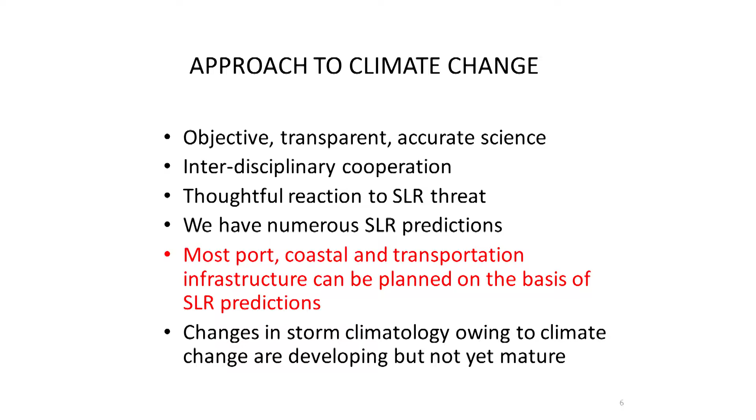Right now, the changes in storm climatology is not that mature a science, at least as far as I can tell. And so how things change in terms of waves and wave action is less understood, and I'll give an example—a little less understood, or maybe considerably less understood, than the water level changes themselves.

If you go to the NRC2 scenario, it's only 1.3 feet. So you have to, if you wish to use those numbers, good. They're a little higher than the IPCC report that was issued last summer.

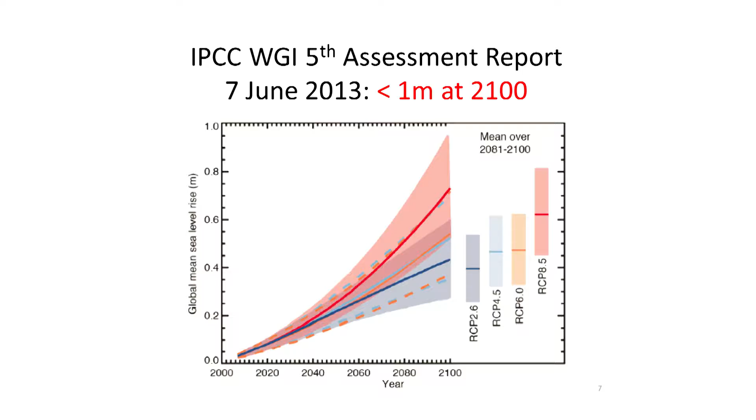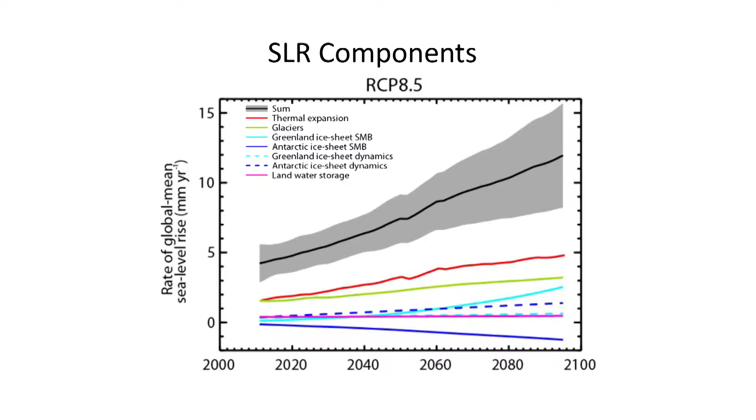In business school, which I never attended, by the way, but I've read up on it, is this idea of decision tree analysis, where you try to make a rational decision as to whether you should invest in one thing over another. So I've tried to adopt this to this case of sea level rise, and I'll step out here to do here.

NRC is the lowest. The medium range is the lowest at 0.2 meters over a 50-year period. And then the NRC2, I have it at 0.39 meters over a 50-year period. And then the NRC3 at 0.58.

And what I've done is I've said, well, if the medium—I've said that the probability is 50% that it would be on the medium path. You can change this around any way you wish. And then I've said 25% chance for each of the other two. Then you go this, I'm making a separate branch for the final 50 to 100 years.

And when you do that, you then break it into different pathways. And I've gone on the NRC one thinking that if once you start on a path, you'll have a tendency to stay on that path.

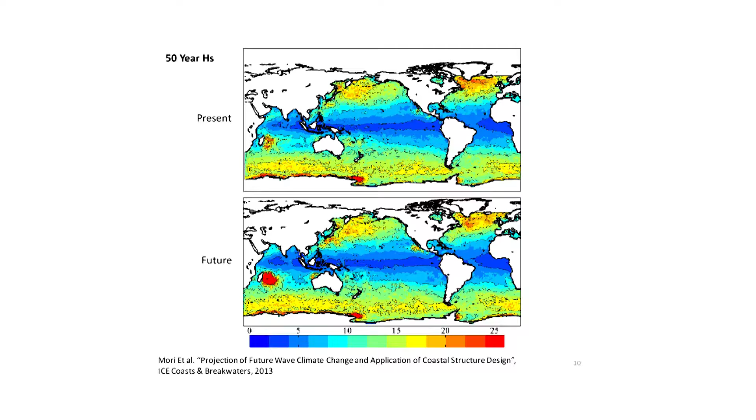I think it'll be some time before we have strong numbers that help us understand how the waves are changing. Of course, in shallow water, in most coastal engineering applications, the waves are depth limited for beaches and most coastal structures. In some parts of the world, like Spain, where they have large caisson structures in deep water, they may not be depth limited. But when they're depth limited, the waves can only be so large. I know people are working on that, but it seems quite a task to figure out what's going to happen to the waves.

So this is the basic concept of adaptive management. You would start with an existing rate of sea level rise, and you might either have a new structure that you design at that rate, probably not, or an existing structure which you'd have to adapt from that. The idea is that at some critical point in time you would make a change to your structure or beach in order to keep pace with sea level rise. Over 100 years, maybe you would do 1 or 2 changes.

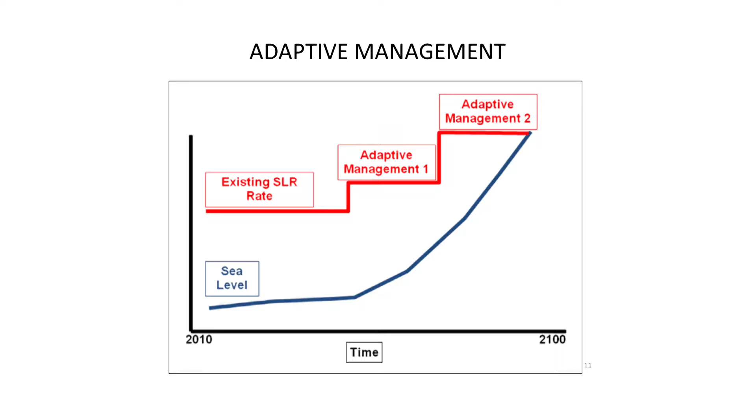We'll start with an example of ports. I've listed the potential impacts to ports: increased flooding and related power loss that can shut things down; weather changes that could affect shipping and cargo movement operations; bigger waves, different kinds of wave climates; pressure on drainage systems; increased water demands in some parts of the world; increased temperature affecting buildings, pavement and equipment; potential changes in sedimentation; and marine structures, fendering, plus the issues of air draft, both under cranes and under bridges.

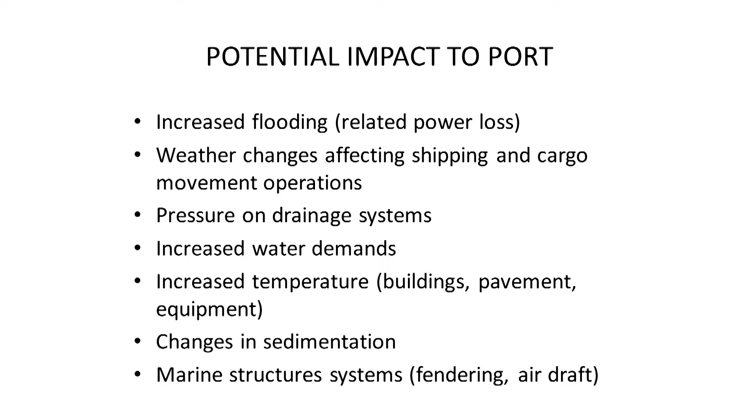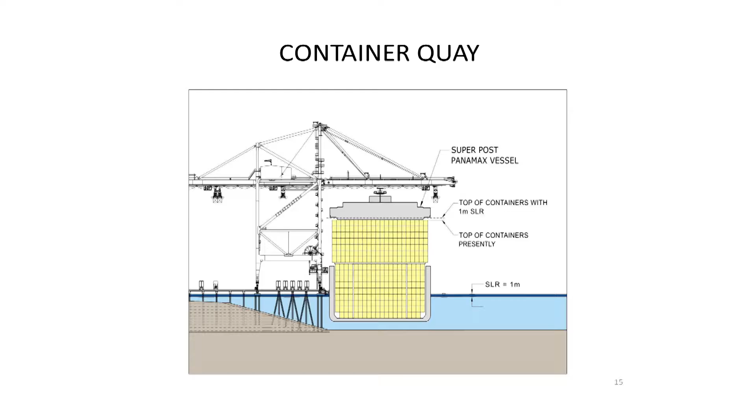If you start to scale for container ships, the change of a meter of sea level rise, in the grand scheme of things, you could reach a point where you might have to take the top layer of containers off. That would be a considerable economic impact, but ships will be changing over time as well, and who knows exactly how that will go. That's more of an economics question than an engineering question.

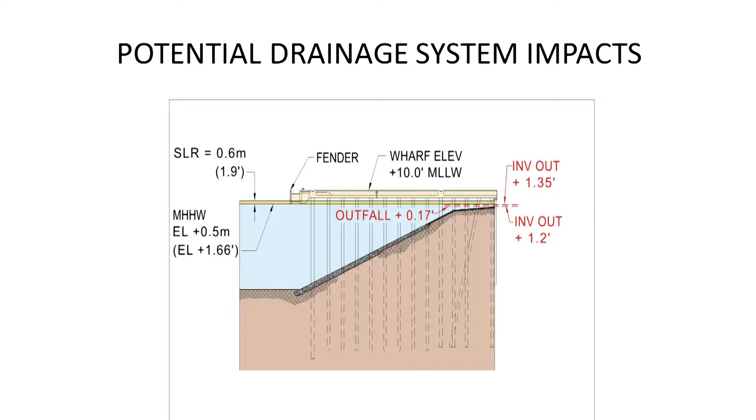You can see the 1.9 feet is over roughly a 50-year period. We are basically, in this case, having drainage problems with outfall. I won't go through all the details, but we'll have to prepare a new trench drain system to take care of the drainage.

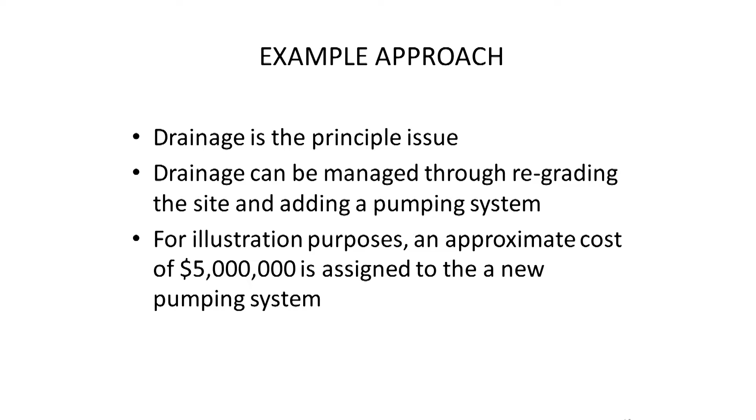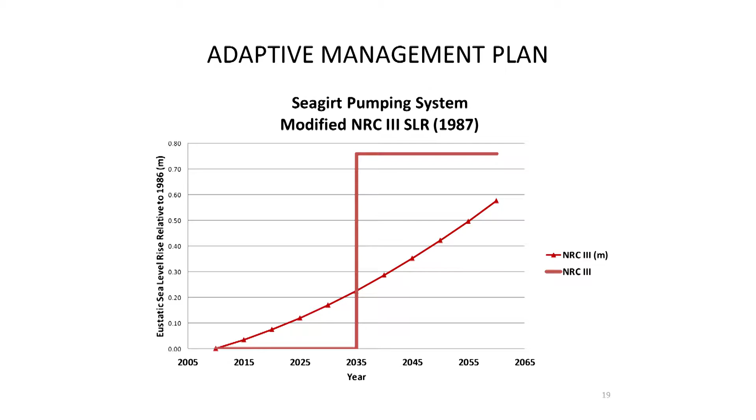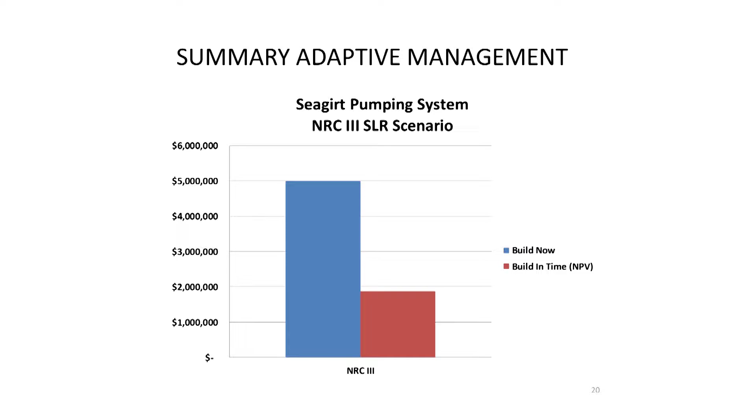This can be managed through regrading and adding a pumping system, which is relatively inexpensive. Essentially, 20 to 25 years from 2010 you might make that investment. If you look at it in terms of net present value, it's the opportunity cost of money. If you're familiar with this economics principle, you don't spend money on something now if you don't need it now - push it off and spend your money on something else.

That sums up the overall thesis: rather than going out there today and starting to raise things, we need to look at scenario planning, and planning is a very valuable exercise. You plan out how you might change your port or your building over time, and have a plan so you can communicate it - people know you're doing something about it, but you're not spending money unnecessarily.

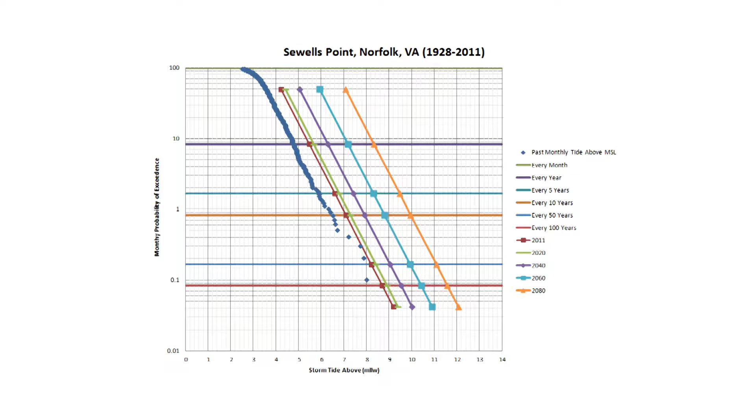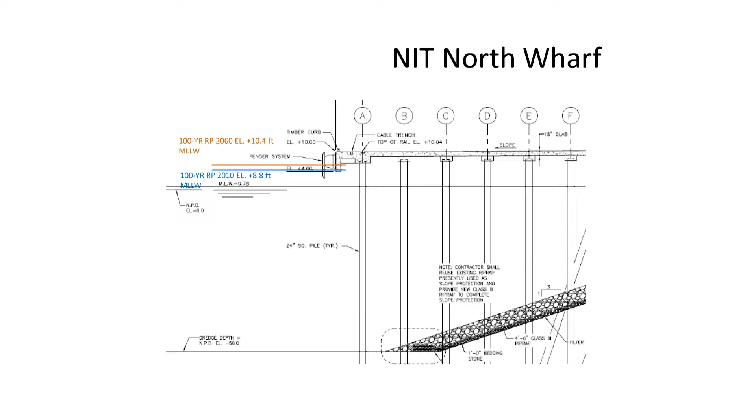So if we look at the NIT North Wharf, you can see what happens over that time. You probably have to do something about the fendering system, you might have to do something about the loads on the berth. But in the grand scheme of things, it's not that debilitating - you'd have to do a whole structural study of the pier and so on.

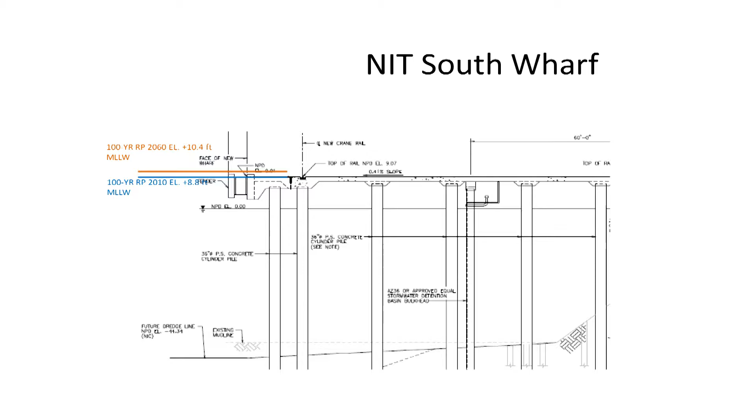But this is the South Wharf. Here we have a little more trouble because they're already relatively vulnerable to storm tide, the 100-year tide now. I've got other examples I'll show you in California and elsewhere as we go along.

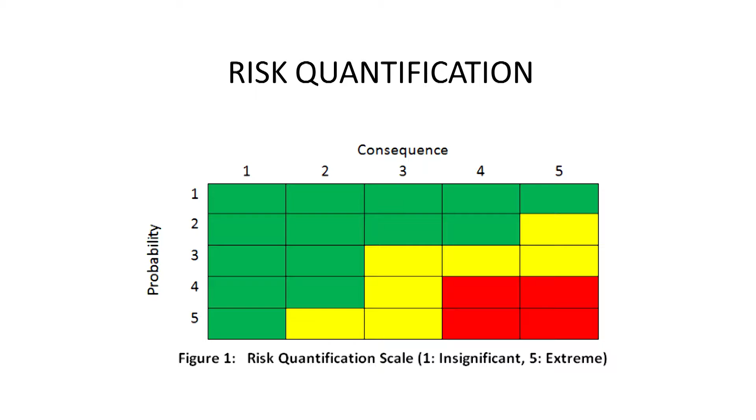The UK has developed a risk assessment approach for sea level rise, with categories like changes to wind, climate and patterns, changes in precipitation, increased temperature, and general climate change. The way they've done it is you have the probability of it happening, and the quantification of risk, where a 1 is green meaning no real impact, yellow is intermediate impact, and red, the 5s and 4s, is extreme impact. So you look at these different factors.

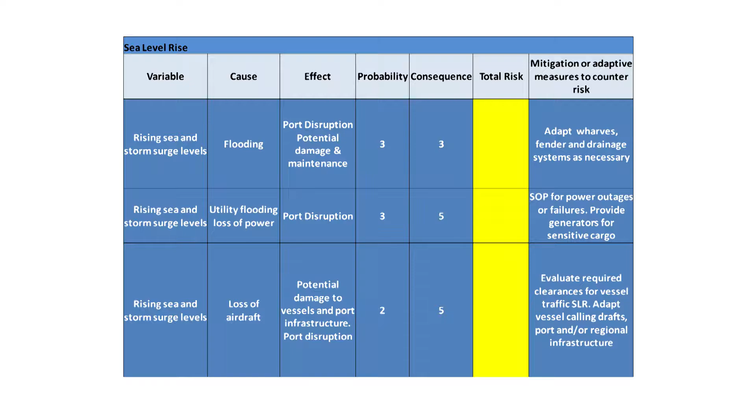This is what we've done for the ports here. Rising sea and storm surge levels is the variable, it causes flooding, its effect is potential damage, downtime and maintenance. We assess probability of it happening, the consequence of it happening, and arrive at this total risk. The idea is that this is not a situation where you do nothing - we would adapt over time to limit this risk and impact with fenders, drainage system changes, and other necessary things.

Then we've got something similar for, again, in this category of sea level rise, loss of power, flooding issues, port disruption, and so on.

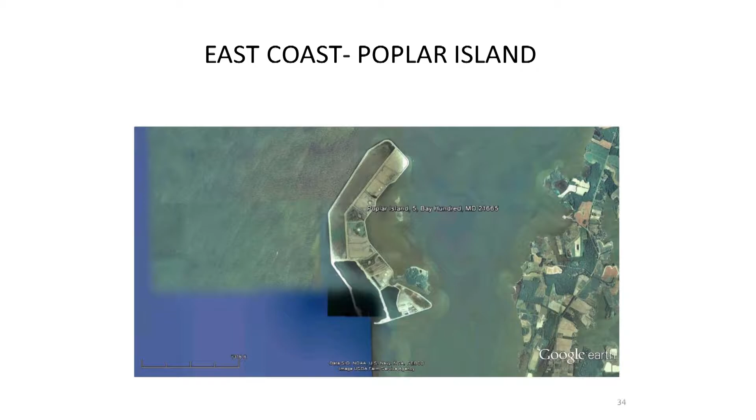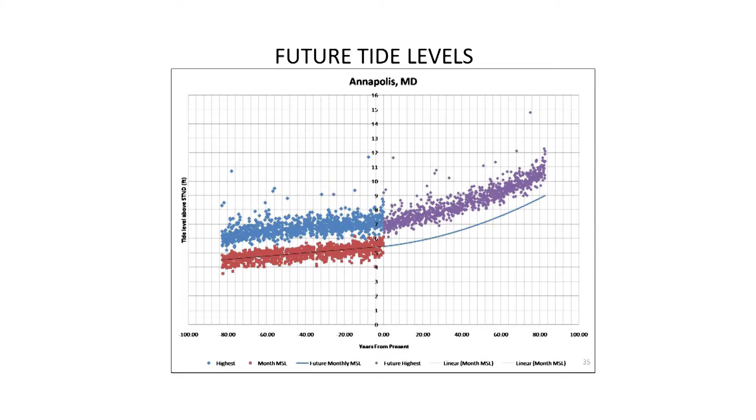So this is a structural example, this is Poplar Island in the Chesapeake Bay. It's a dredge material placement site, some of you may be familiar with it. Again, this same analysis, I won't go through it again, but this just shows the shift in return periods and water elevations over time based on the Annapolis gauge.

This was the original cross-section design of this structure, and you can see it's a rock-armored revetment seawall, if you will, and it was designed for a crest elevation so that it wouldn't be overtopped because there's a gravel road behind it. So basically, I think this is an important point.

If you look at a coastal structure, the difference in water level over a 50-year period, and to a large extent over a 100-year period, is not likely to make you go out and put new rock on top of this structure. The changes in rock size required to keep pace, at least over the 50 years, is a relatively small number. You're just increasing, if you know what the SD is in the armor calculations, you're just increasing the damage the structure will have over that 50-year time.

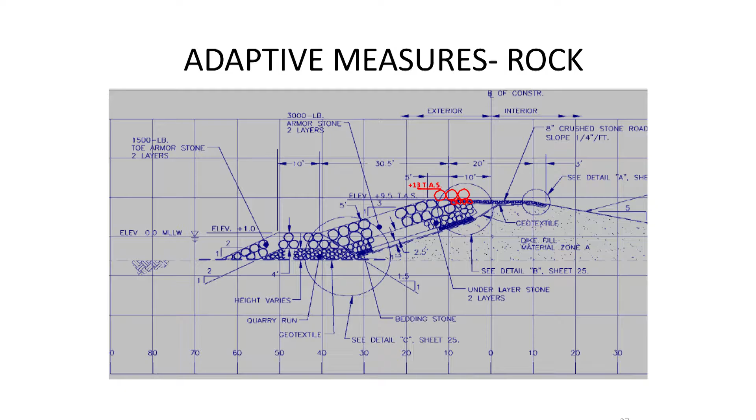It would be, I think, foolish to go out and overlay it with rock that only has to be 15% higher than the rock that's already there. So I think that's the way to handle this. On the other hand, if you start to look at the overtopping, and if you're very vulnerable to overtopping, you might want to do something for it. So what I'm showing here is a layer of rock and an underlayer that will provide overtopping protection in the future. You'll see something like that in another example later.

On the other hand, when I click, this doesn't always change, maybe it's the angle I'm at. The other thing we've been trying to work on is looking not only at using rock for such a thing, but also having grass-armored revetments.

Because a place like this site, which is full of sediment because it's a dredge material placement site, they can plant grass. Of course, they'll have to mow it, which is not particularly attractive. But at any rate, there's a lot to be done, there's a lot of possibility there. And I think the softer armor, there should be more of that in coastal engineering.

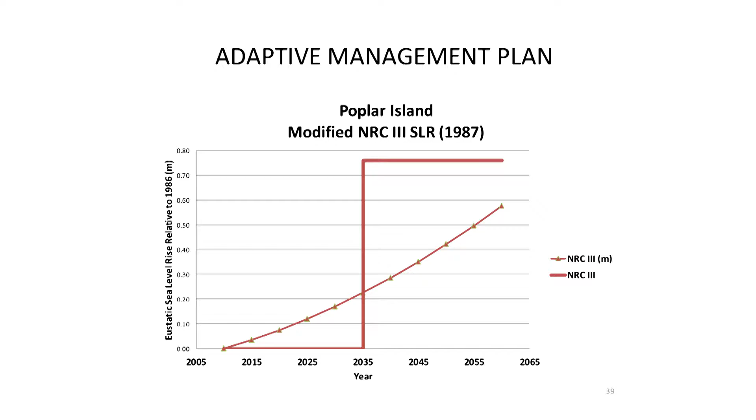There's some, so that's, I'll talk a bit more about that in a minute.

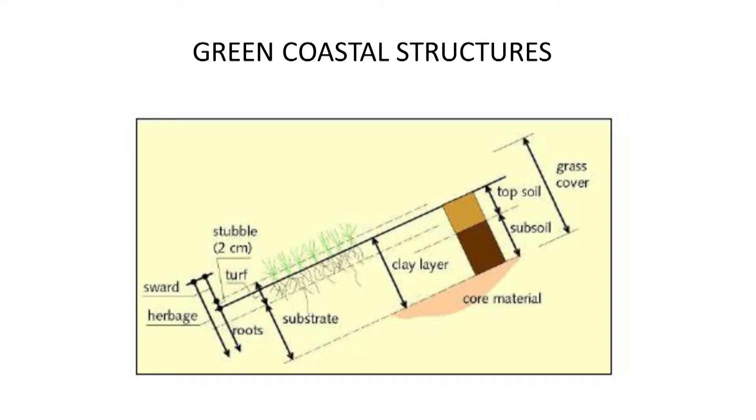And I'll show you an example in California that bears the same conclusion. You look at the difference in wave height, because the waves are depth-limited, it's hardly changing at all.

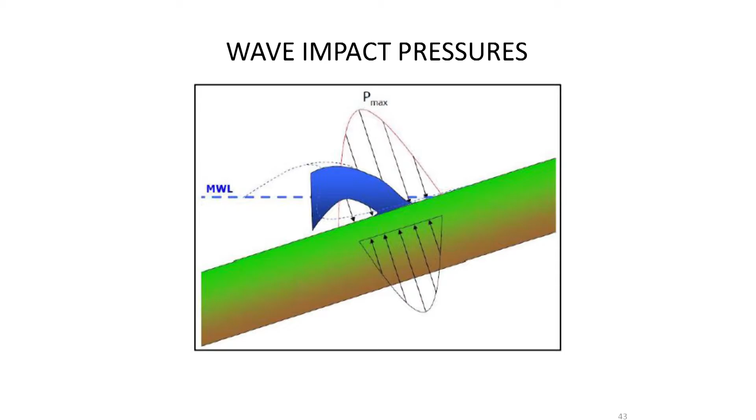So just practical things. This is a model developed by the Dutch on how to compute the forces on grass slopes, and this gives you an idea. There are two failure mechanisms.

One is called aggregate erosion, where you're starting to get these bare spots in here. And then there are these block erosions, where you lose a big part of the revetment all at once. The structure is more resistant to block loading rather than the aggregation.

So it's all been developed on the basis of full-scale tests in Dave's favorite flume in Germany. And so what you can do with the equations that they have there is you have the wave impact forces, and it's treated as an impact force.

And then through a bunch of other equations you can determine what the erosion depths are. When you reach a certain erosion depth, then it's considered to have failed. There's a couple of other parameters in here, erosion parameters and number of impacts and so on. But what we found in this particular case is that the allowable wave height would be about 2.3 feet.

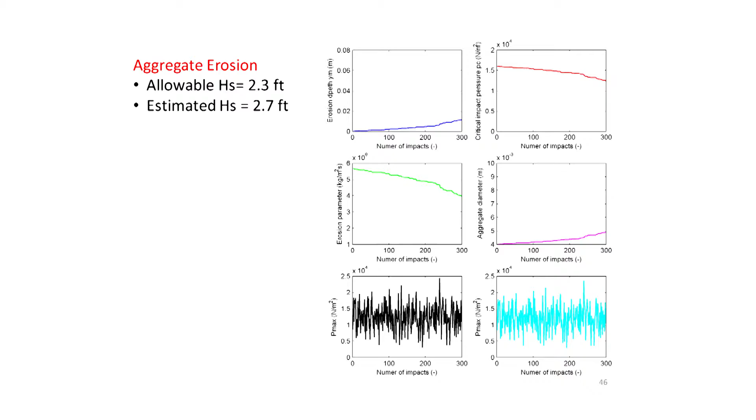All right, West Coast structure, Los Angeles. For those of you familiar with California, you'll know they don't have much storm surge. They have different kinds of waves there, much longer wave periods, but no storm surge. So if you're an East Coast snob, you'd say they have it easy, but they say their waves are so big and they have tsunamis, so their problems are harder than ours.

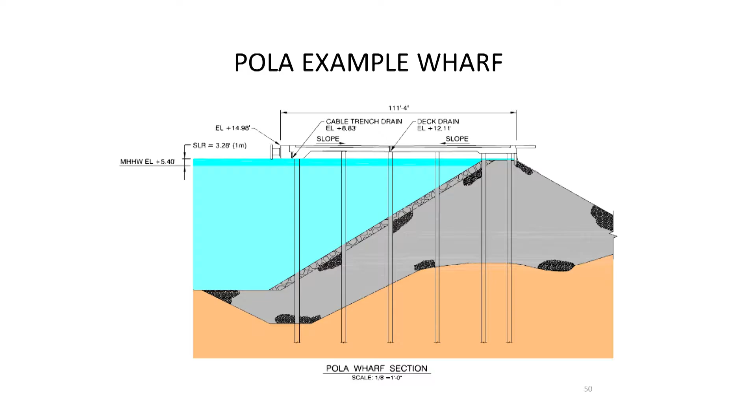This shows you the Port of Los Angeles, its ports, similar to what I showed you before, the difference with a meter of sea level rise. Not an insuperable problem. Most of these projects will be rebuilt. Few piers have more than a 50-year life.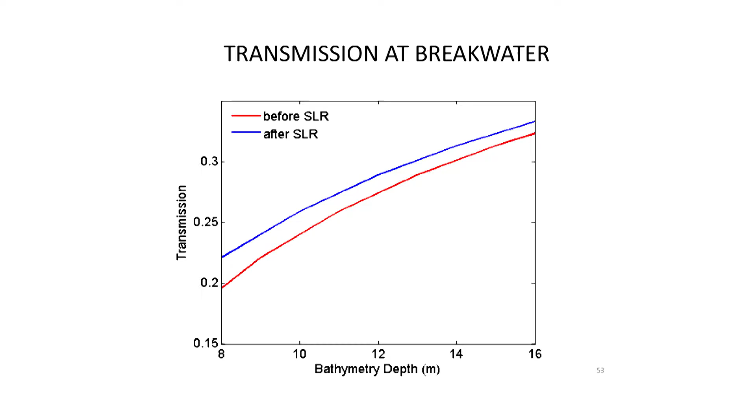This slide shows that before and after sea level rise, you don't see a strong change in the transmission coefficient between those two scenarios. Well, you don't have the before. There are always gremlins. Well, that's not going to help.

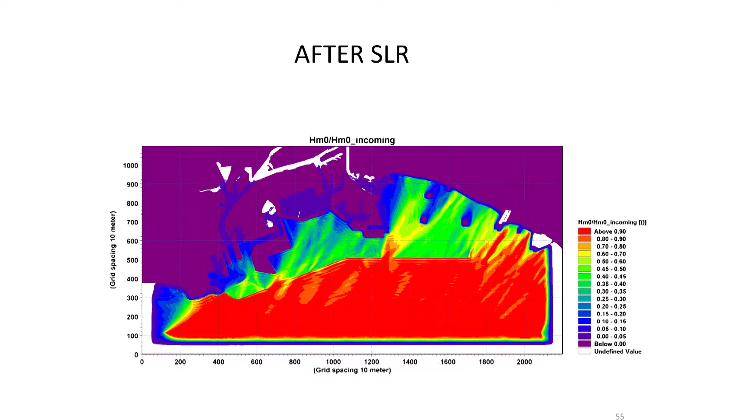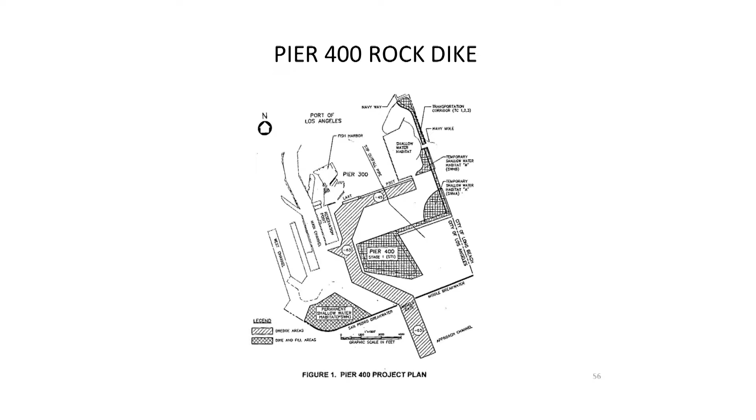I'm showing here, this was a landfill project for the Port of Los Angeles, and this is the most exposed face. The design wave for the 100-year event is about a 20-foot wave. So it's significant, a big wave.

But it was model tested and found that it could be handled. They were using something like 25-ton rocks, I believe. I might have them up there.

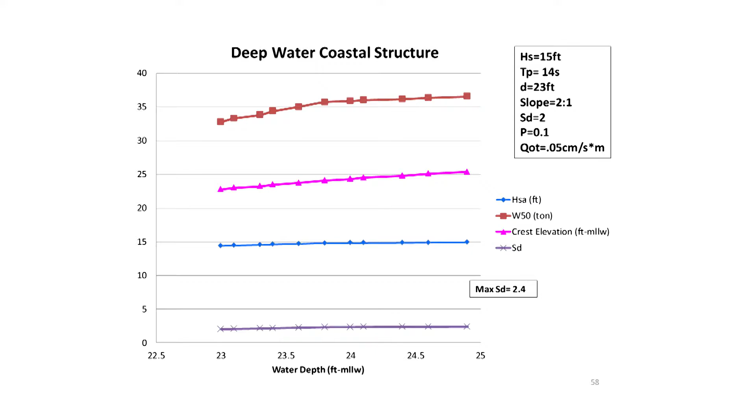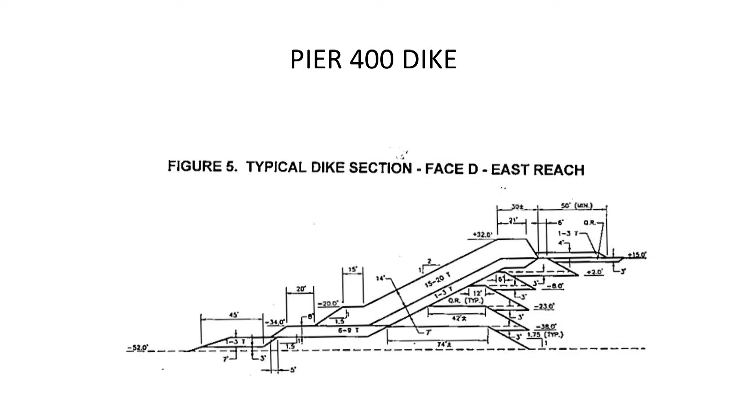You see a need again for a change in the crest elevation, but it's relatively small because they don't have that big storm tide part of it. The change in the SD just goes from 2 to 2.4, so it's still a structure that's going to hold up. In this case, we might put some protection on the top or just on the back slope because it's slightly above grade there. That's what I was talking about, slightly above the grade.

Just looking at this a different way, since I've already shown you the numbers based on Van der Meer's equations for rock size. But we originally did a design optimization to design this structure, which balanced the damage costs, which go down the higher your return period, against your construction costs, which go up higher with larger return periods. Somewhere in there is this optimal balance of damage and construction costs to get the total amortized costs.

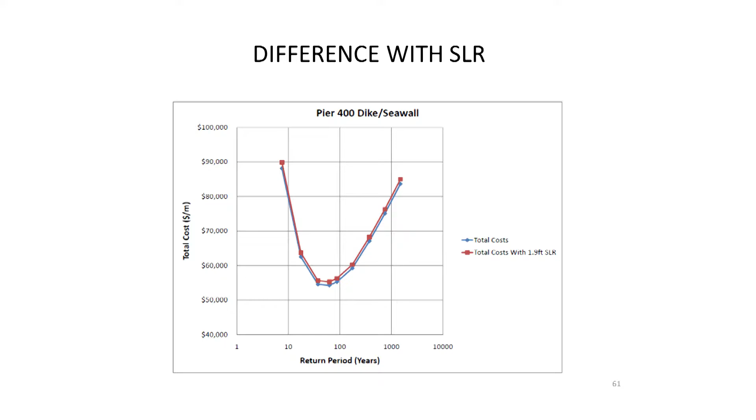So what happens here is I'm showing the difference in the optimization curves with and without basically 2 feet of sea level rise over 50 years. And you see it's just not, again, it's the same thing over and over again.

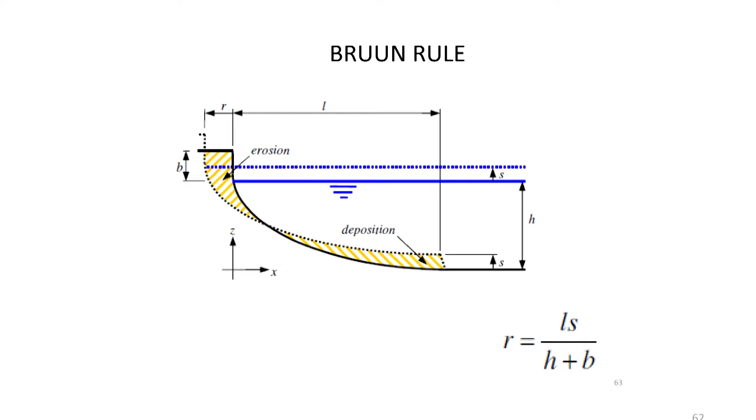Okay, on to beaches, so maybe changing gears in a different direction. Many of us know about the Bruun rule, a very simple geometric method of figuring out how much beach and what volume of beach you lose in a given sea level rise. So I did an example based on the Duck Pier, using basically a 90-year period, or a 100-year period of sea level rise.

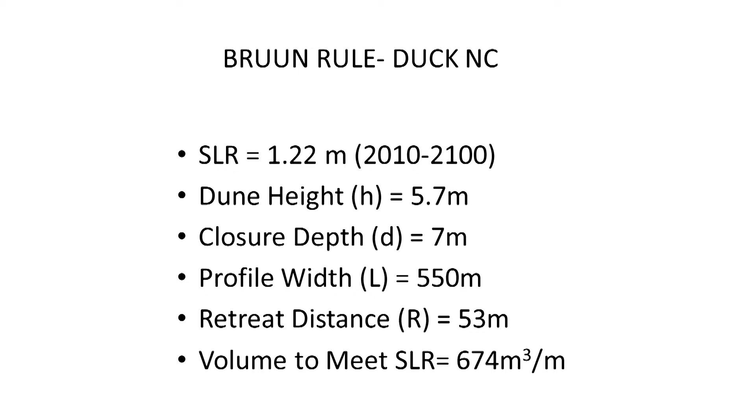We've got dune heights close to what they have now, closure depth similar to what they have now, and all these other things. The retreat distance over that period of time is projected to be 53 meters, over 150 feet, and the volume is shown here. Sorry for the metric units. This shows those same parameters over time.

And then this shows what would you do if you placed a beach fill there. They're not doing that very often there, but if you did it over 10 years, this is what it would cost and how you'd go about it.

All in all, if you had to do this, yes, it would be expensive in a lot of ways, but if you look at the net present value overall, building it instead of doing it ahead of time, which you wouldn't do because you'd lose the sand too quickly, but if you did it overall, $1,000 a meter. So is that too much to pay to keep a beach in place over the long term with this threat? You don't have to do it now, you have to do it when the problem really faces you. So these are the kinds of questions we'd have to look at.

So here, basically, I've summarized the same again, except I've given a total volume per meter per year. This 6.4 - in Holland, they're putting this amount on their coast to keep pace with sea level rise, but for different reasons.

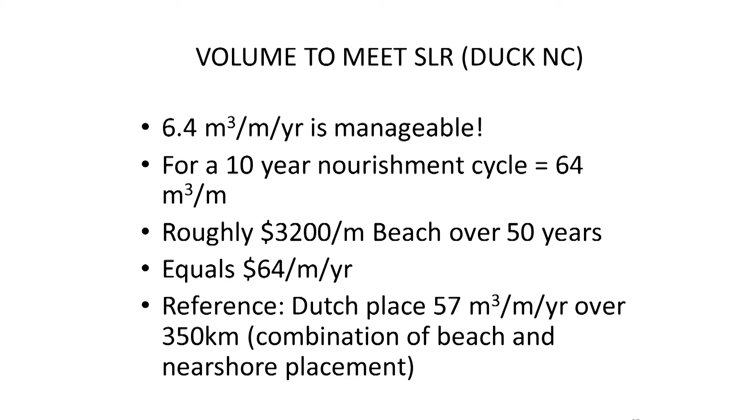Now I'm going to talk to you about work done that's an alternative to the Bruun rule, and the punchline is that it shows that the Bruun rule is at least 50% more conservative than this model.

The way you do this is you generate a 100-year storm time series. What we did was use the recorded data at the pier, randomize it, and reuse it. Then you compute the sea level rise for each storm as it occurs over time, and estimate the beach recession using the Dave Kriebel and Dean model, a simple model. We did it using a Monte Carlo method, running many simulations to get a better statistical assessment of the issues.

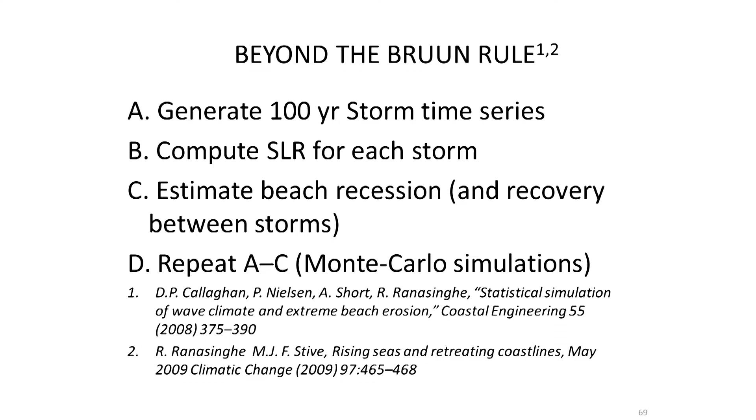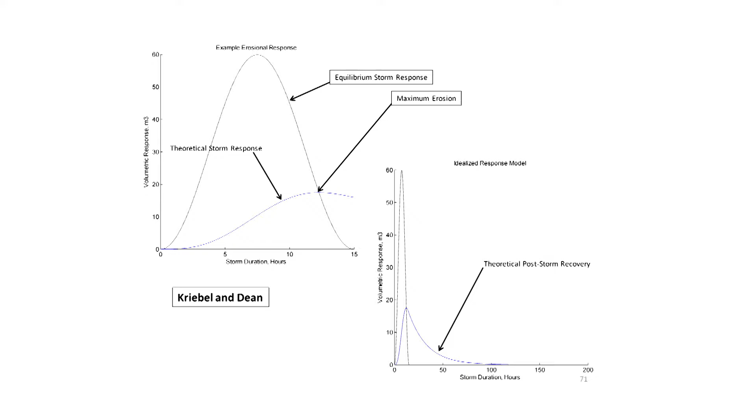This is the idea of the recovery - a very simple recovery rate that Dave Kriebel developed, and we're using that formulation. This shows the position of the shoreline over time with the Bruun rule.

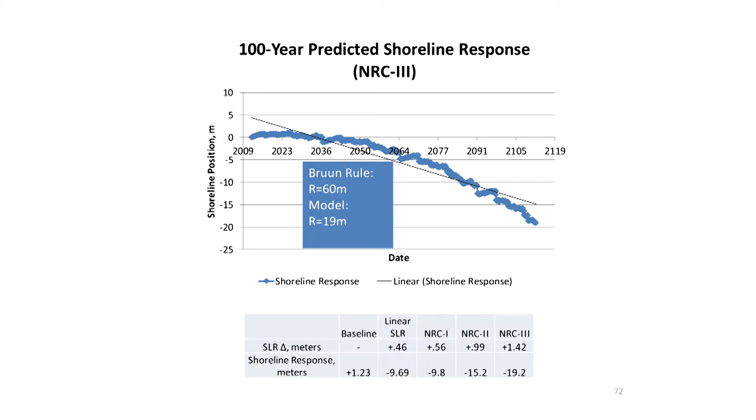This is the Bruun rule numbers. This is the numbers with our simulation, which is basically minus 20 instead of 60. I think I've got some others.

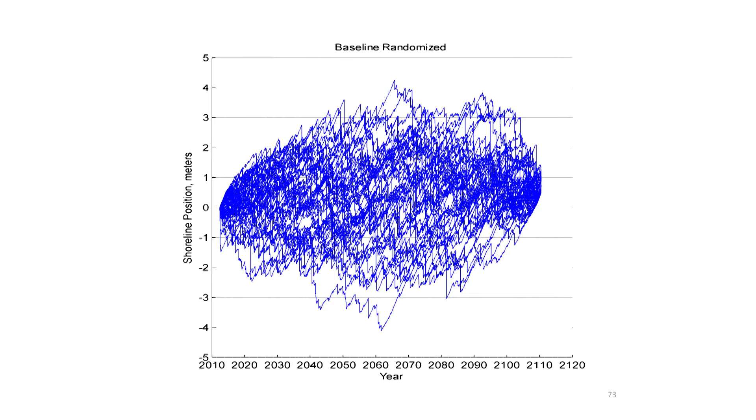So I think this has a lot of promise, and I'd like to see it used more. We're starting to make it part of our protocol. We've also got a separate model for the West Coast that I won't go into, but it has to be different because the way the beaches retreat there is different.

Next subject: sea level rise and marshes. The idea is that as sea level rises - and these are the various factors involved - you want to understand whether a marsh will drown or keep pace. So I'm using a West Coast example.

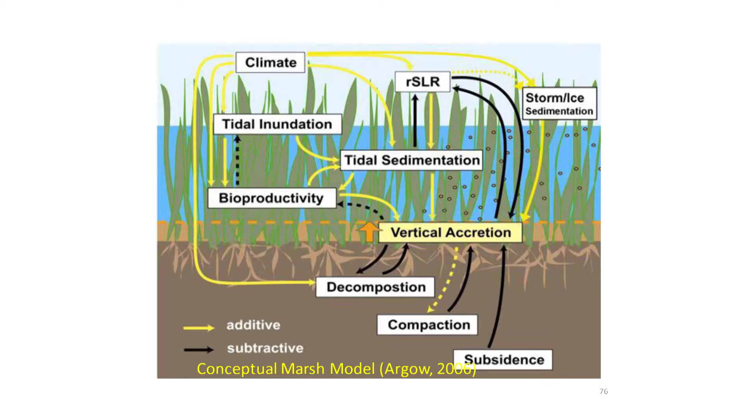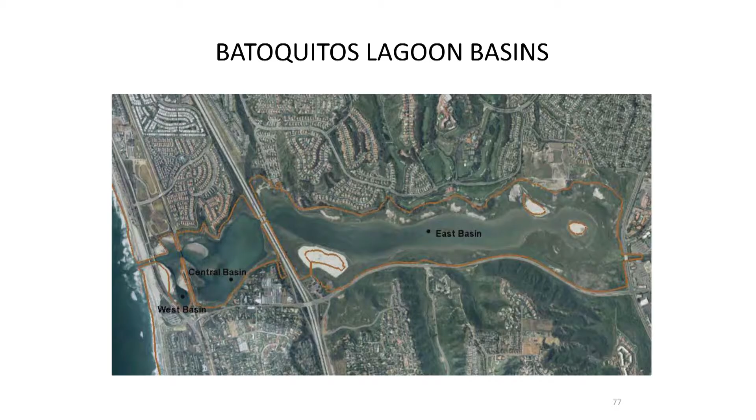This is an environmental restoration project we worked on - actually the mitigation for the Pier 400 project I showed earlier. We had to make this a non-navigable ocean entrance to keep it open, although we knew it would have to be dredged, and it does. So we're just looking at this basin. I'll go quickly through this, but you'll get the basic idea.

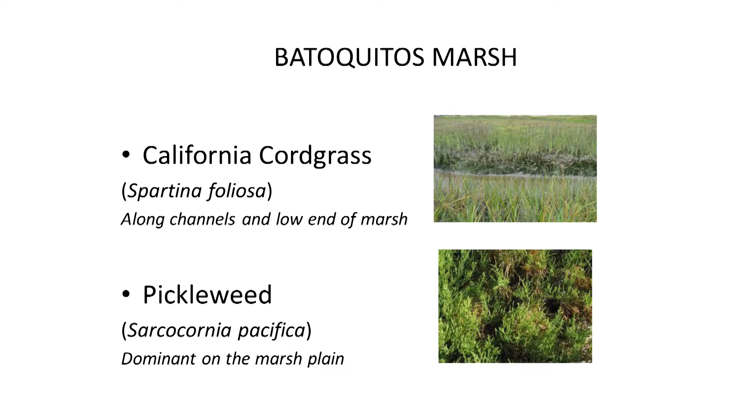This is the marsh grass, California cordgrass or pickleweed, for different locations and elevations. This shows you the site itself. There's a model developed at the University of South Carolina, the Morris model, and the basic idea is that there's a stable point - an optimal depth where you have stable marsh that will keep pace with different changes in water level.

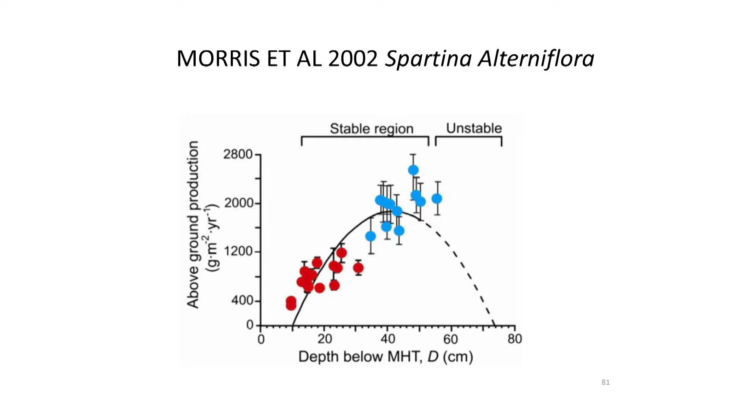I'm not going to go through the equations, but we calibrated it for this case at Batiquitos, and this gives you the basic idea. You can see here that if we look at the marsh elevation, it's starting to - and this is in the NRC 3 scenario.

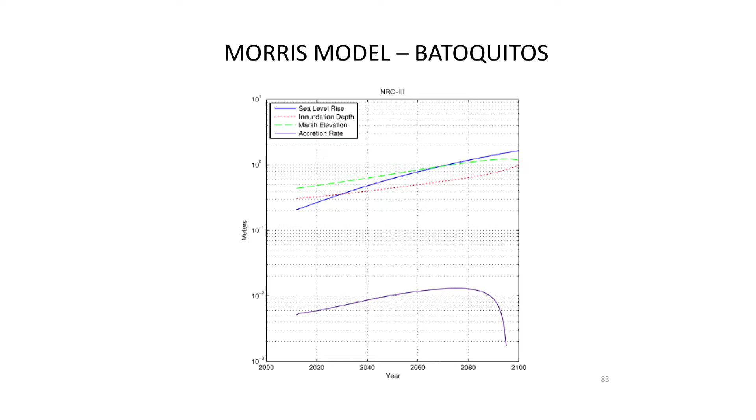It's beginning to take a dive here at the end, around 80 or 90 years. You can see the accretion rate is really dropping off in that period of time. So according to that particular model, it'll be some time before the marsh actually drowns.

This is a Krone model, a separate thing. I'll just show the results for it. Krone against Morris - it's not quite the same thing, but what's happening is the marsh started out above the water and then ends up over time being physically drowned. Whether its production is dropping off the same as the Morris model, that's not the case.

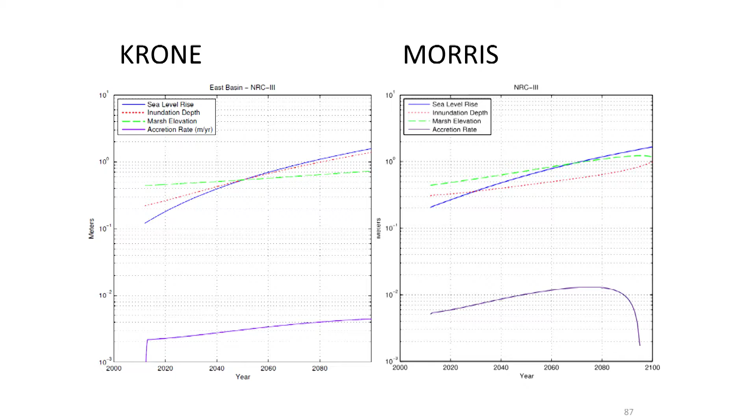But either way, it is a worrisome thing because, again, in this case, it is being submerged at that period of time. This, if you just take the vertical sediment demand for an area, shows you how much you would need for each of the NRC scenarios.

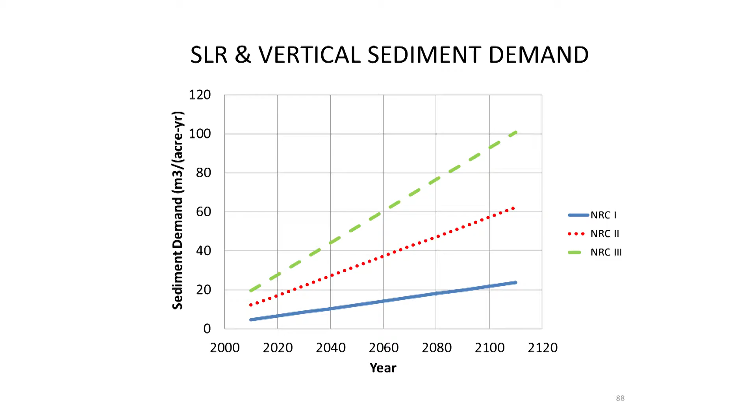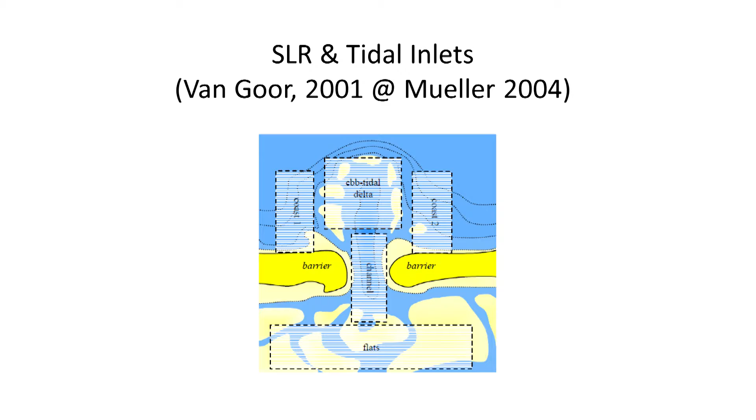So I've been really interested in this issue of sea level rise and tidal inlets. This is a work in progress for our firm right now. We'll have it up and going, but I'll just show some results developed by others. The idea is this is a long-term assessment of what happens to the channel itself, the ebb tide delta, and the tidal flats inside a bay and a barrier island.

It's a fairly simple formulation, almost algebra. This is what you see with the channel itself: as sea level rises, or with the increased rate of sea level rise, the equilibrium volume of the channel increases. For the same case, here's the channel volume increasing, but that comes at the expense of both the delta volume and the flat volume, both falling off over time quite precipitously, depending on the rates of sea level rise.

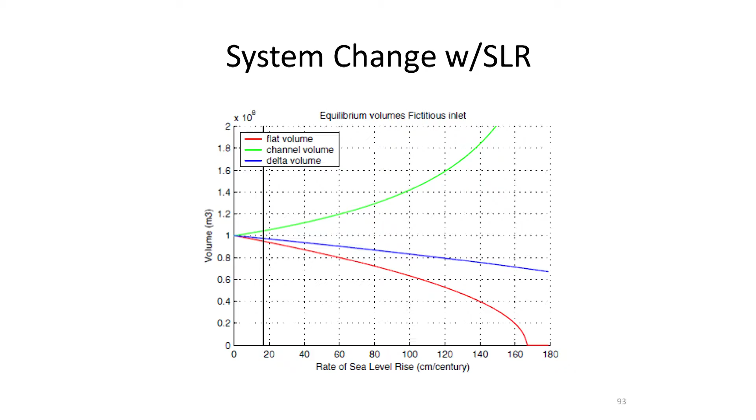So final observations: adaptive management we think is a logical strategy, and it's more economical than trying to build something today, or retrofit something, or build something new for the full 50 or 100 year projected sea level rise. On the other hand, if there are cases, smaller structures or whatever, where making it a little higher isn't going to change the cost much, that has to be examined. But at the very least, I'd plead that people consider this adaptive management approach.

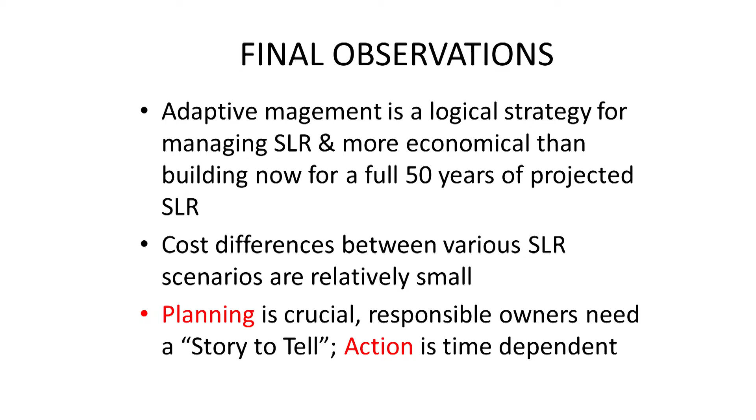And then the cost differences between various sea level scenarios, I'm saying, are relatively small. You could see that with the rock example, you could see that with the beach example, and so on. And then planning, I think, is crucial. If you make a responsible plan, you have a story to tell to people who ask you the question: what are you doing about climate change? So I think that's the main thing.

Okay, so just for fun, I'm throwing in something which could be controversial, I suppose. But we've been looking at storm surge barriers in various locations up and down the East Coast here recently. So I'm just going to show something quickly. This author, Headland, worked out this concept that you could unify the way the costs of storm surge barriers work based on experience throughout the world. There are a few in the US shown here, but most of them are in Holland or elsewhere in Europe.

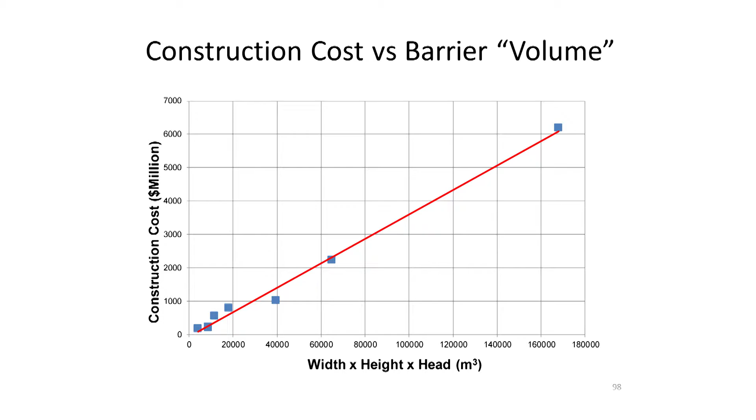To show more details, you can look at this at your leisure regarding the storm surge barriers. This is a plot of essentially the volume, being the width of the structure across the river or water body, the height of the structure, and the head, which is the water level difference. And it correlates quite nicely with the costs. This was first done in the 70s by an author named de Ritter, but it's been extended in recent years.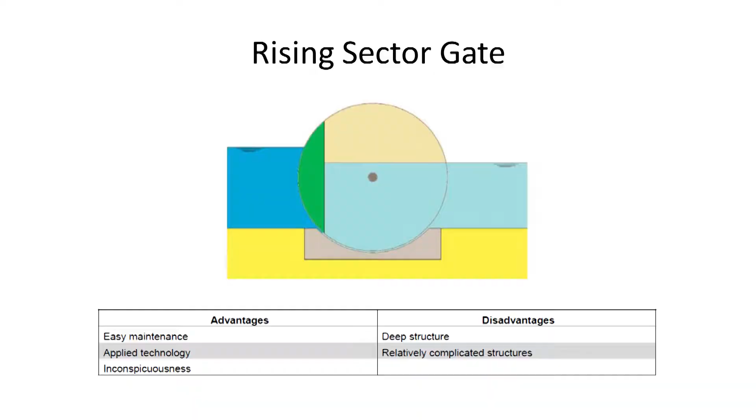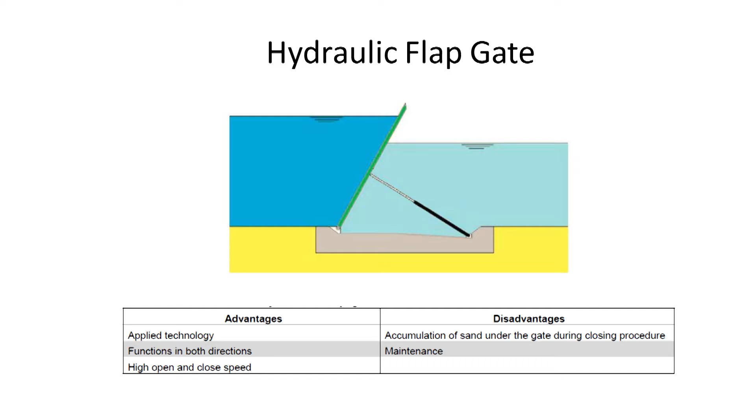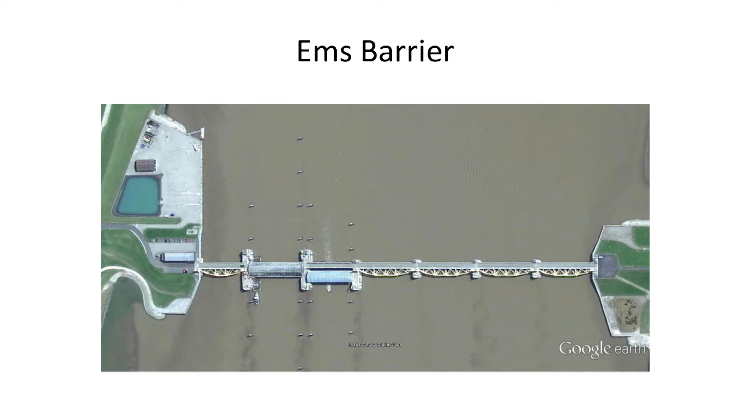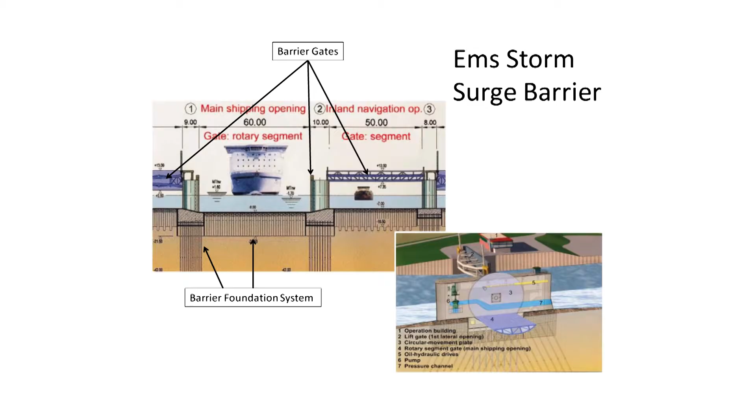So here they've just got a gate segment, and here they have a rotary gate system, shown at the bottom. This is a U.S. system that held up quite well in Hurricane Sandy, built in the 50s after the big hurricanes that hit there.

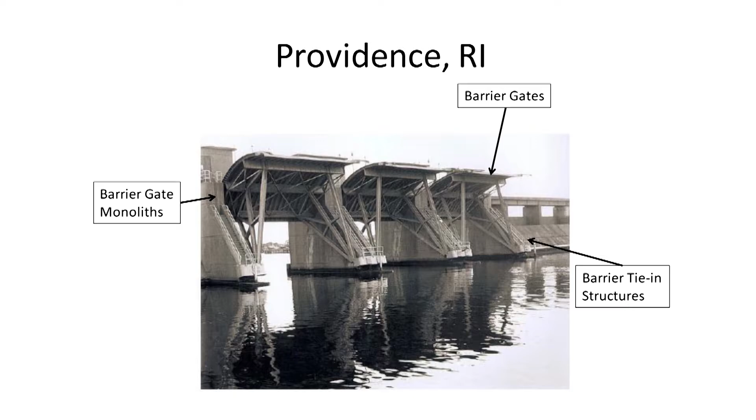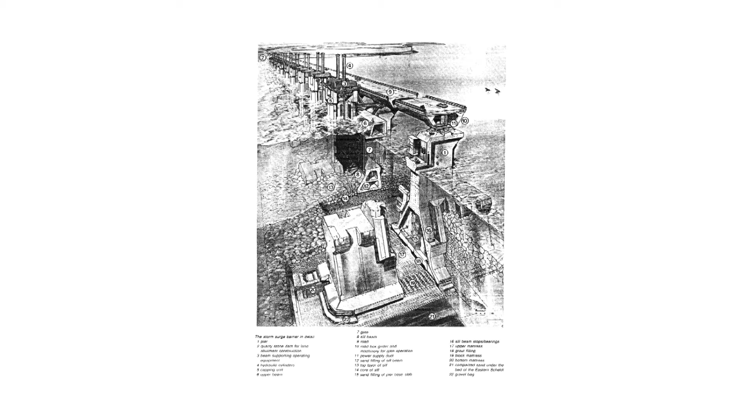A lot of people might find this controversial, but the Dutch coast is 300 miles long, the same length as the North Carolina coast basically. With their GNP and what's at stake for them, they can afford to do projects like this. I'm not sure we can do too many projects like this. So in a sense, we have greater challenges because we have to pick and choose where the benefits are and how we go about our coastal engineering. That's not a knock on the forever innovative Dutch approach, it's just simply a fact we have to bear in mind ourselves.

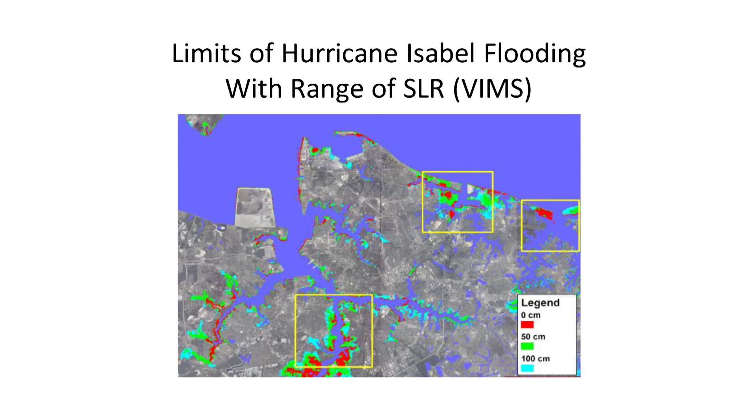So, potential storm surge barriers here. I just took a shot—I don't even recall where I got this from—but it's showing the areas potentially inundated by large storms and sea level rise. This is a VIMS report.

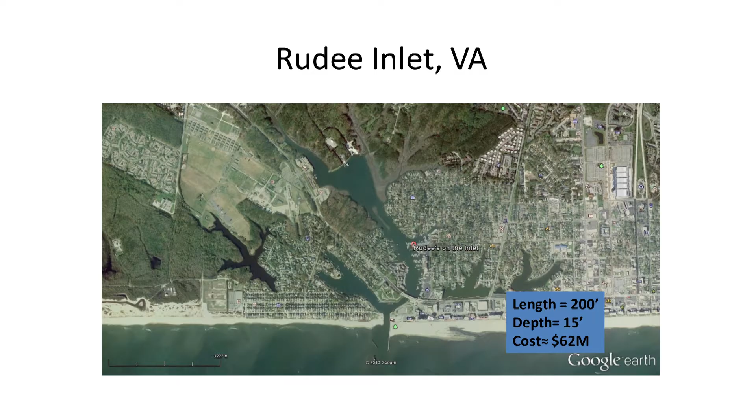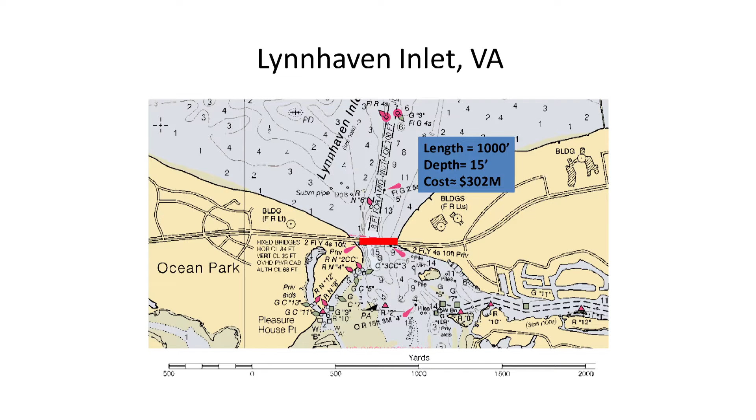This just shows Lynnhaven Inlet, much wider span. Now we're at 1,000 feet, 15-foot depth, $302 million. But if you look at the area it protects, this is a lot of area that would be protected by such a structure. I'm not arguing for or against it, I'm just presenting it. It's something you would have to study in detail. Hopefully you could provide a gate system that would be transparent to the day-to-day flow so that you wouldn't change anything very much.

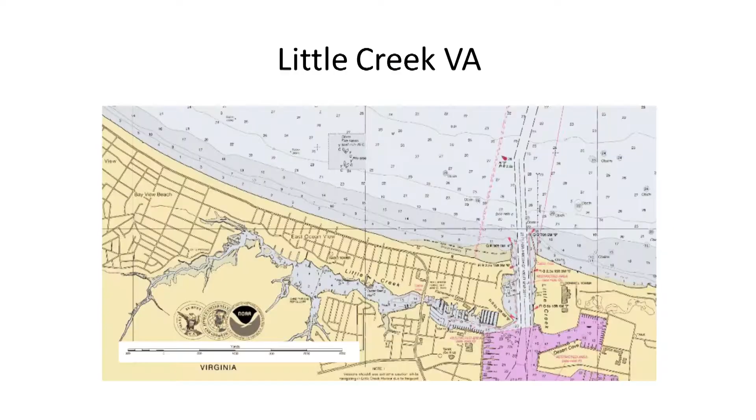Little Creek, shown here, a smaller one—22 feet, a little deeper though, so we're here at 355 million.

And then the Elizabeth River—this would provide a wide expanse of protection. It's the most costly one at 2.8 billion. The average depth across there is about 25 feet.

So this is obviously a very—yes? Can we just add in, that doesn't include pump stations, that's just stopping the water from coming in. That's correct, not getting any of the water out. Thanks. Yeah, just focusing on the storm surge barrier itself.

What we haven't really taken all the way out is what else, if anything, we'd have to do further down the system. That's a question of phasing, of where the water levels are during the hurricane between those two spots. Chances are you'd have to put something in there somewhere. But at any rate, I'm trying to be the provocateur here to get a discussion going on this subject. So these are the overall rough costs that include the basic information.

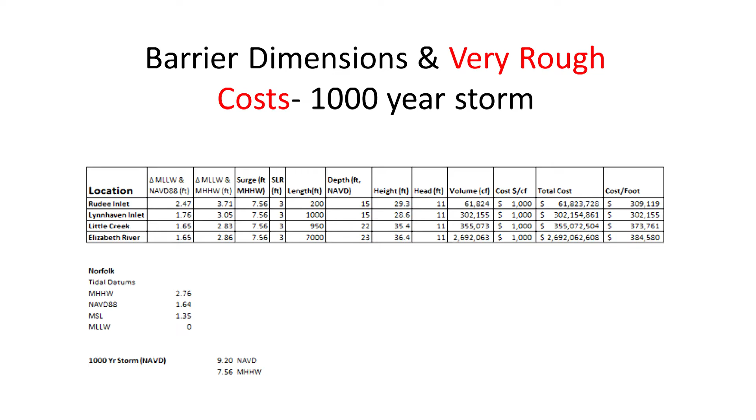Okay, that's it. So, well, at the end, a little provocative. Anybody have any questions?

You used probabilities—that in itself is very controversial. How did you come about those, and how did you account for the significant degree of uncertainty associated with them? On the fault tree? Yes. I tried to just balance it, it's just one scenario, Ed. I'm intrigued by this; if you read up on this fault tree analysis in the economics books, it's at least a rational way of looking at it. You can change the numbers any way you wish. I was trying to balance and see, at least on one of the conditions, how much I'd have to stack the deck to get the 1 meter. That was my point.

Everything has to go in that direction of worst case to get there. Now that's separate from the IPCC and so on. But I think the IPCC is an important number all by itself. It's roughly 0.8, it's less than 0.8 meters.

So I think most of the dialogue in this country is not talking about the IPCC. And I can't explain why, except that I don't think any document has been more scrutinized or peer reviewed than that document.

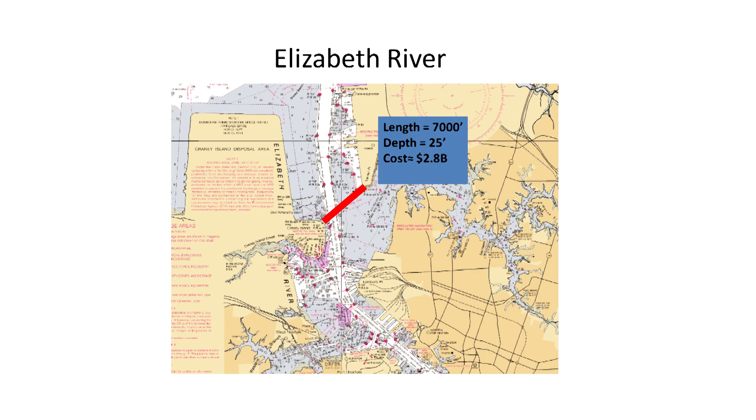I want to hold this up—this would be the last point, just to show how academia can get involved. I'm responsible for the Senior Civil Engineering Design Project this semester, and we have a team looking at a movable floodgate barrier across here. These young senior civil engineers are having a difficult time coming up with the cost, so your curve there with the estimated cost is really going to help them.

Now, are any of those students in the room? I told them that if they didn't come to this lecture, they would fail the course. They don't get the paper. They don't get the paper, but I'll make sure they get the paper. So, thank you, John. Thank you.